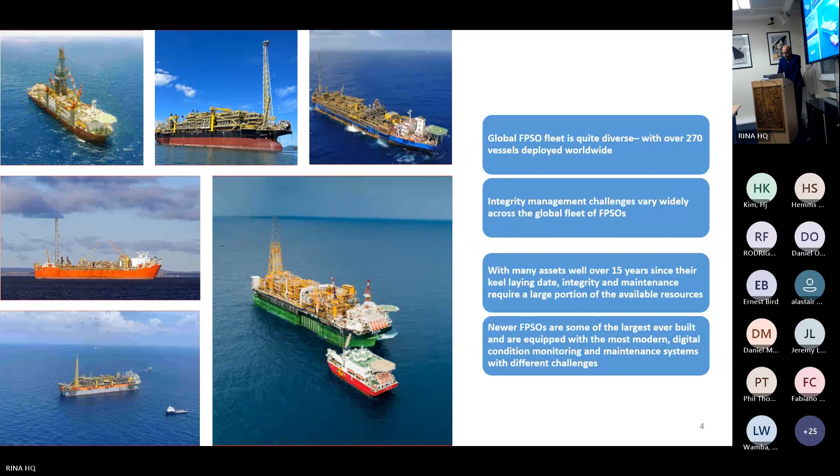The integrity management of FPSOs could be categorized into the wells integrity, comprising the downhole equipment, drilling riser systems and associated systems; the subsea integrity, comprising the subsea equipment, flow lines, flexible risers, control systems and associated equipment; the FPSO hull and marine systems, comprising the FPSO hull structures and marine piping systems and associated equipment; and the FPSO moorings, comprising the suction pile, chains, polyester ropes, mooring jewelry, chain stoppers, and associated systems.

Then the FPSO topside structures comprising of the structural modules, the pipe racks, the local equipment rooms, the workshops, laydown areas, and so on. Then comes the pressure systems, the FPSO pressure systems comprising of the piping systems, the pressure vessels, heat exchangers, and associated equipments.

Each one of these categories will be a topic on its own for separate discussions.

Today, I'll be discussing with you the FPSO hull and marine systems, which comes under the classification of structural integrity management strategies. This would provide an overview of typical integrity management strategies followed on FPSOs.

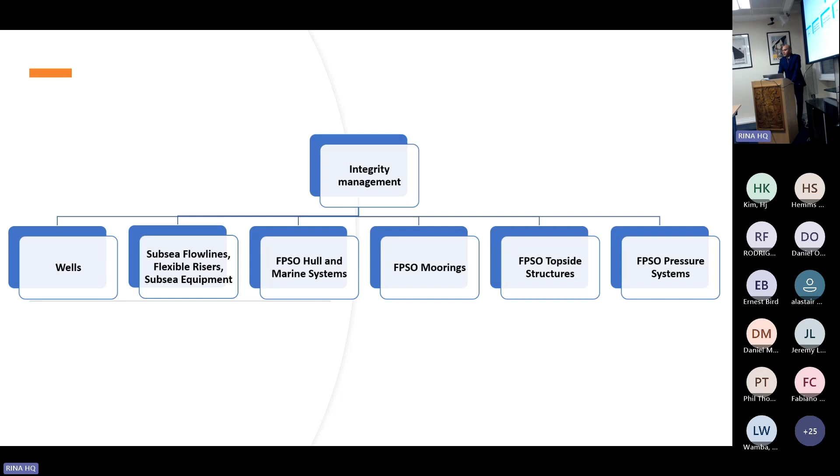The starting point of integrity management is the class rules and the industry guidance, which includes applicable industry recommendations such as API, ISO, and other regulatory requirements such as the IMO MODU code, SOLAS, MARPOL, and the class and flag state requirements.

The integrity management involves the inspection plan development, the inspection execution, the anomaly management, and the fitness for service assessments.

Opportunities to support the FPSO integrity management can be adopted from several different areas. These include procedural improvements, the application of new technologies, design improvements, and the utilization of digital solutions.

Let's look into the inspection plan development. The structural integrity management program starts with a class rules-based foundation.

The traditional inspection regimes use inspections on a calendar basis to verify the integrity of an asset. A key difference in the operation of FPSOs is that, contrary to the regular dry docking intervals of marine vessels of every 2.5 years, FPSOs often remain on station for the entire service life.

Being stationary, FPSOs are subject to a more uniform parcel offloading pattern and site-specific environmental conditions that make the structural load aspects more predictable. This creates the opportunity to consider a different inspection regime from that of sailing ships.

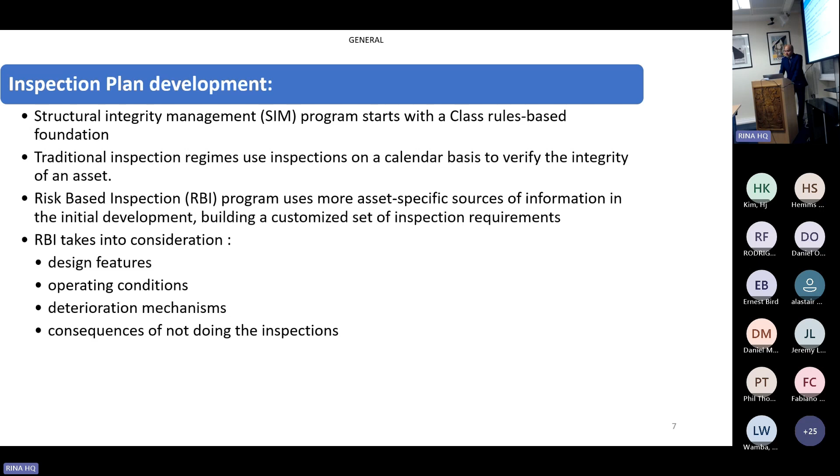The RBI also takes into consideration the design features, the operating conditions, deterioration mechanisms, and the consequences of not doing the inspections.

The RBI utilizes a risk assessment and management process to develop and manage a forward-looking inspection plan that directs inspections towards the areas of highest risk.

It focuses on failure modes initiated by material deterioration or degradation mechanisms, where risk can be effectively addressed through inspection of the equipment and structures.

By optimizing the inspection regime using risk-based techniques, opportunities may also be identified to minimize not only the asset risk, but also the safety risk to personnel performing the inspections.

This is a proven dynamic asset integrity management method that uses risk techniques to prioritize the inspection activities, identify and understand the risk drivers, and as a consequence, develop and implement effective risk mitigation strategies.

This specifies which components to inspect, identifies the degradation mechanisms, the components that are affected by these mechanisms, the appropriate inspection method for each particular type of scope, and defines the frequency of the inspections.

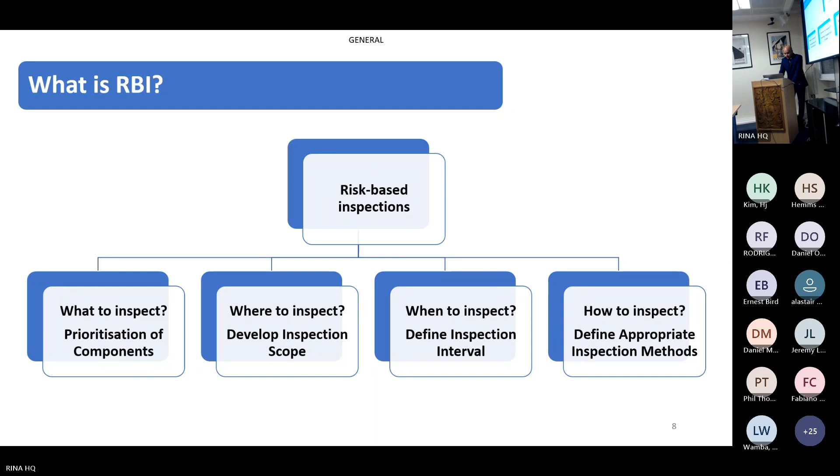The development of the RBI plan involves the data gathering phase, the component grouping phase, the baselining and fitness for service assessments, design analysis that includes global and local strength and fatigue analysis, selection of components for structural reliability analysis, determination of target reliability level, and the fatigue and strength reliability analysis.

This also involves qualitative risk assessment to identify critical elements and other factors that are not covered by the reliability analysis. Thereafter comes the RBI plan development phase that defines the inspection and monitoring requirements.

The component grouping phase delineates the components within the asset hierarchy into manageable logical groupings or inspectable units, with an understanding of the applicable degradation mechanisms driving the scope of inspection within the unit.

The FPSO hull structures, the mooring systems, marine systems, riser systems, and the topside modules consist of many components, and each has a role and function in the overall integrity of the asset. Understanding the complex interactions and dependencies of these elements will determine the efficacy of the program.

This boils down to a question of damage mechanisms and the correlation of these mechanisms across a grouping of structural components, if that correlation exists at all. In other words, what are the prevalent damage mechanisms? What is the best approach to inspect them? And what to do when anomalies are discovered for those damage mechanisms?

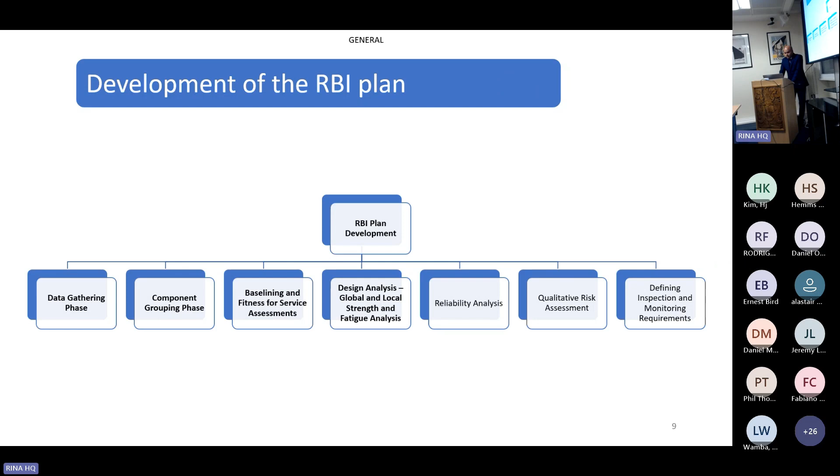The consequences of the risk event come in the x-axis and the likelihood of having a risk event in the y-axis. It is noted that the risk assessment for the prioritization step will be limited to the scenarios resulting from the deterioration mechanisms of the components within the scope of the analysis, and which can be detected by inspection, but also further informed by the asset's unique structural features.

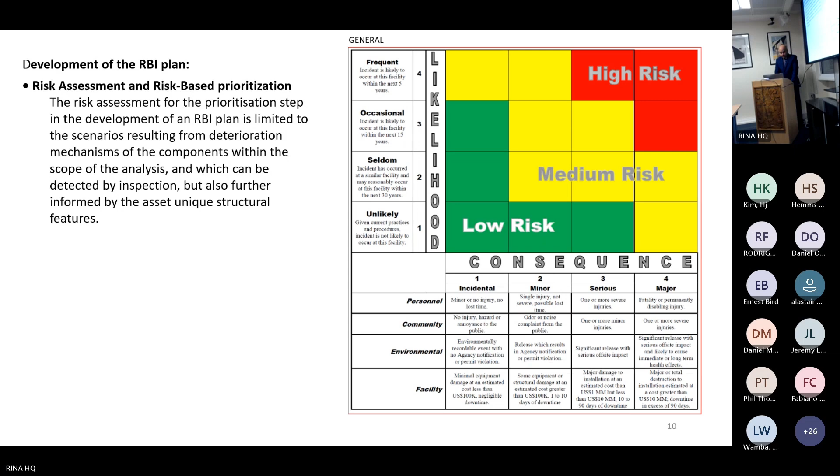One key factor in defining the inspection frequency is estimating the likelihood of an undesirable condition occurring based on the component's current condition and degradation rate.

The corrosion rates of FPSO structures depend on the effectiveness of the cathodic protections. In the case of cargo tanks, the cargo composition, the content in any space, the content composition, the inert gas properties, the temperature of the contents, the maintenance activities on the structures, and so on.

Each inspectable component should have its own inspection interval defined based on the component reaching a damage condition rather than the failure, but realizing that the worst cases within an inspectable unit may drive the overall inspection frequency of that unit. For the RBI plan management, these decisions are part of managing the plan with time and are directly dependent on the age of the unit, the structural configuration, presence of anomalies, and so on.

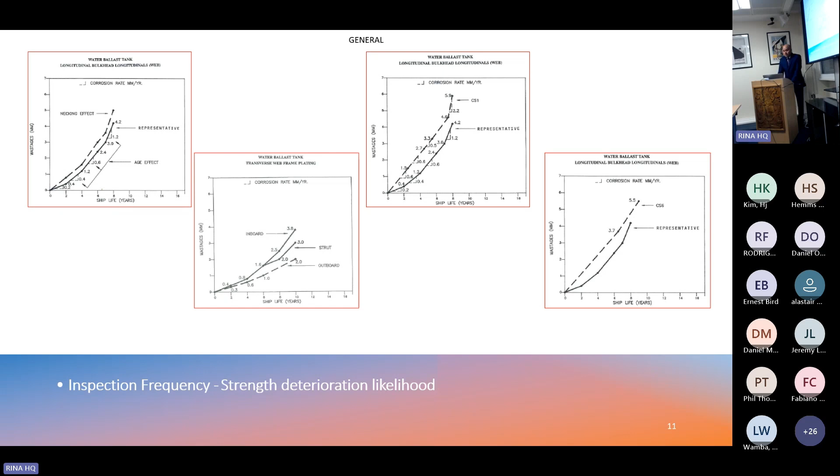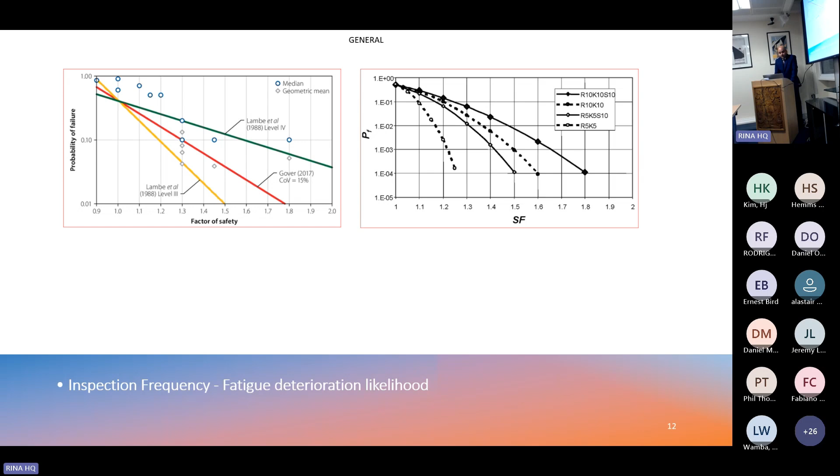And now moving to the inspection execution phases. Generally the underwater external hull inspections up to 30-meter water depth are carried out by divers. However, there are safety implications associated with this activity, and hence ROVs are widely used for underwater cleaning and inspections. This short video footage shows the cleaning and inspections of the hull using ROV.

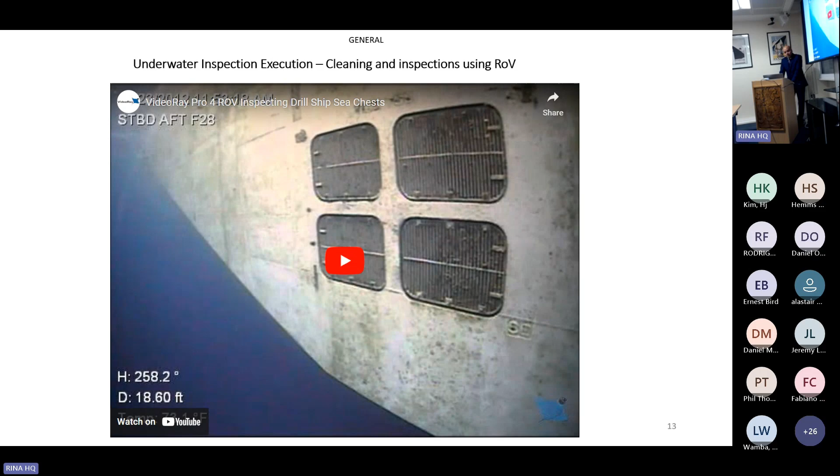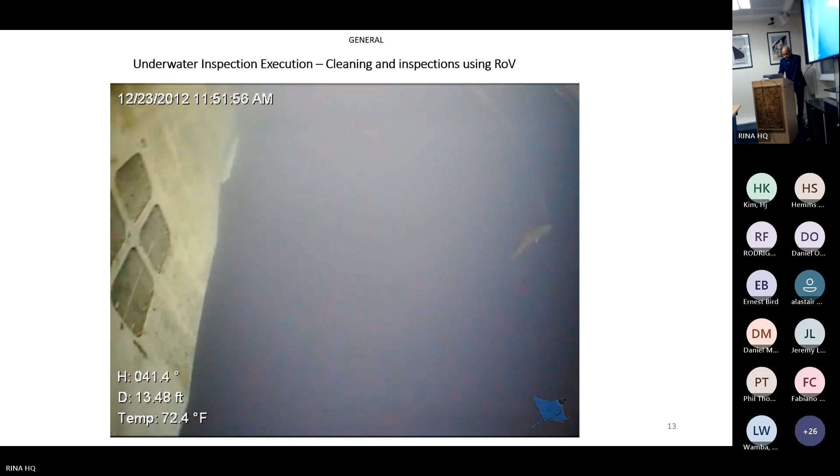I was having some other video earlier and it didn't work, so I just picked up something else here. It should be showing hull inspections getting done by the ROV. That's just to give a flavor of the activities ongoing. That's the intent of showing here.

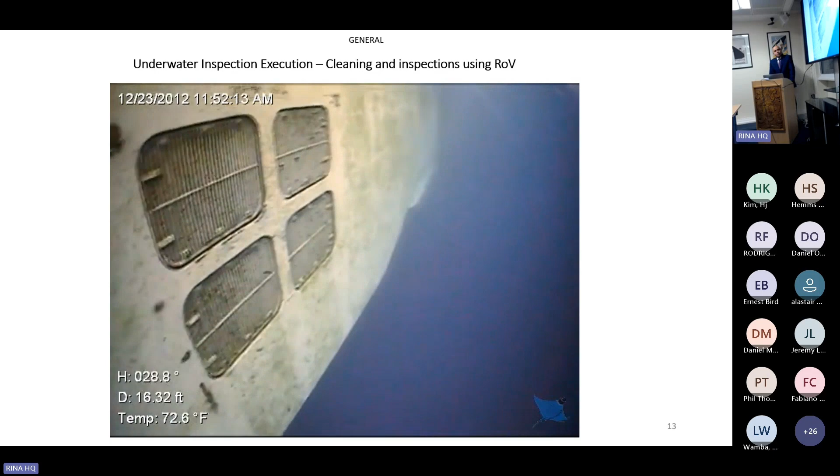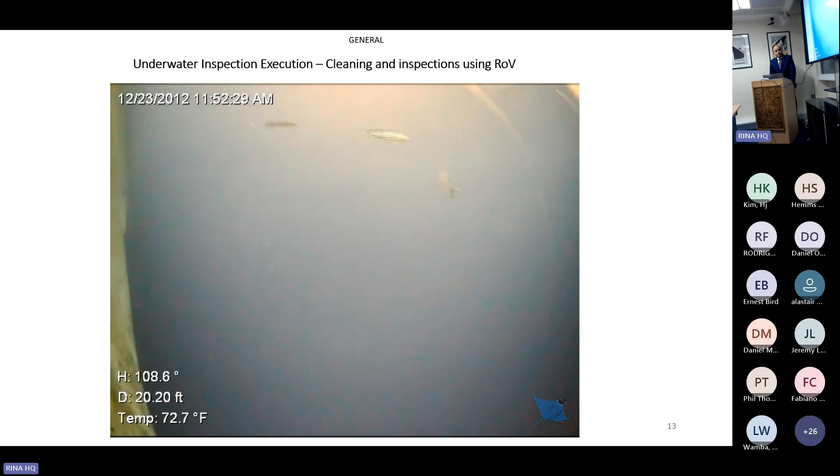So there's a sea chest over there. All the grills will be cleaned by the ROV. Instead of divers, we normally use ROV. Divers can do that work too. So this gives a flavor of those activities. Now let's go to the next slide.

Now moving into the internal hull inspections. One of the challenges of the internal hull inspection is the confined space entries. The confined space entry is a high risk activity. Confined spaces pose dangers because they are usually not designed to be areas where people work.

These spaces often have poor ventilation, which allows hazardous atmospheres to quickly develop, especially if the space is small. The hazards are not always obvious and may change from one entry into the confined space to the next. Carrying out inspections on board an FPSO with concurrent production operations is a major undertaking and requires detailed integrated planning and supporting good coordination of activities.

Entering a confined space, including tanks, requires complete cleaning and gas freeing of the compartment. There should be provision for ventilation, lighting, and access. It also requires certification that the tank atmosphere is safe for entry, especially if residues remain in the tank. A high temperature atmosphere in the tank could be prevalent depending on the location of the space.

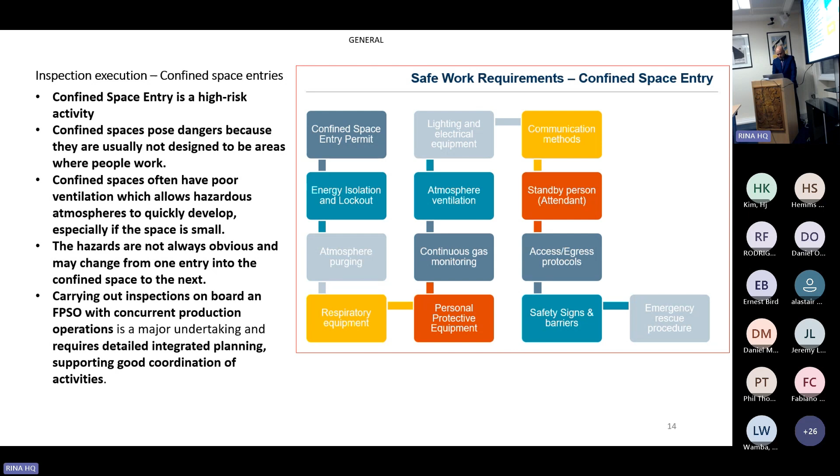The factors to be considered for the confined space entries include the tank isolations, the operational impacts, the personnel aspects, the structural strength and fatigue aspects, and the financial aspects, to name a few.

The storage tanks to be inspected need to be positively isolated as per the operational standards and taken out of service. The tank system's positive isolation can be a challenge, making it difficult for storage tanks and related piping systems to meet the positive isolation standards.

The challenge is more noticeable with FPSOs converted from conventional tankers with pump rooms and bottom piping as compared to the newer FPSOs fitted with submersible pumps. Also, a safe de-isolation of tanks and return to service is required on completion of activities similar to a trading tanker.

On the operational aspect side, the simultaneous operations, SIMOPS, aspects need to be managed effectively. For example, in the case of void spaces with dehumidification systems in place, opening the tank for inspection reintroduces a more corrosive environment. On the personnel aspect side, the tank cleaning operations may expose personnel to safety hazards such as naturally occurring radioactive materials, mercury, and so on.

The people on board, the POB constraints while carrying out inspections, is in order to accommodate additional personnel such as the rope access teams, scaffolders, inspection engineers and technicians, painters, tank cleaners, class surveyors, rescue personnel, and so on. They all need to be factored in.

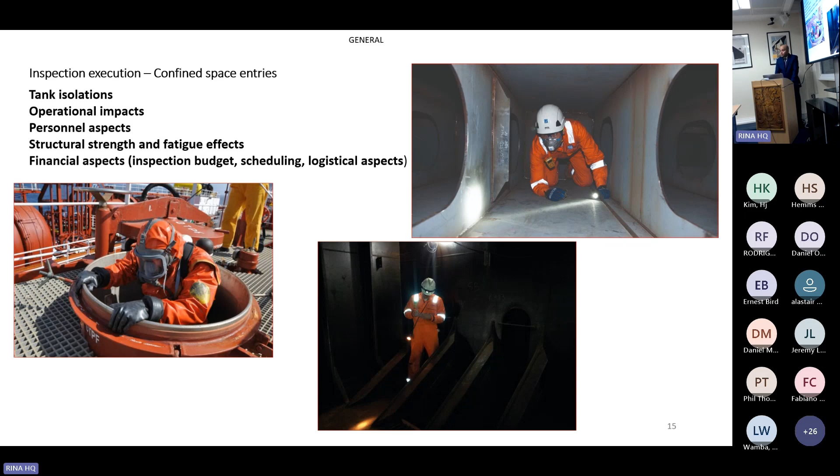For inspection at heights and in confined spaces, drones have now been widely used and have been shown to be able to provide a visual survey and UT gauging of structural components inside tanks, confined spaces, and topside structures. This short LiDAR and video footage indicates the visual and UT inspections of the cargo tanks using drones.

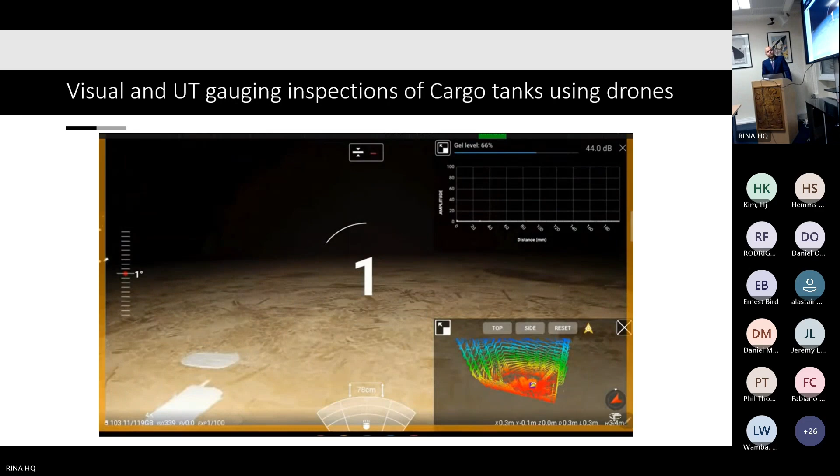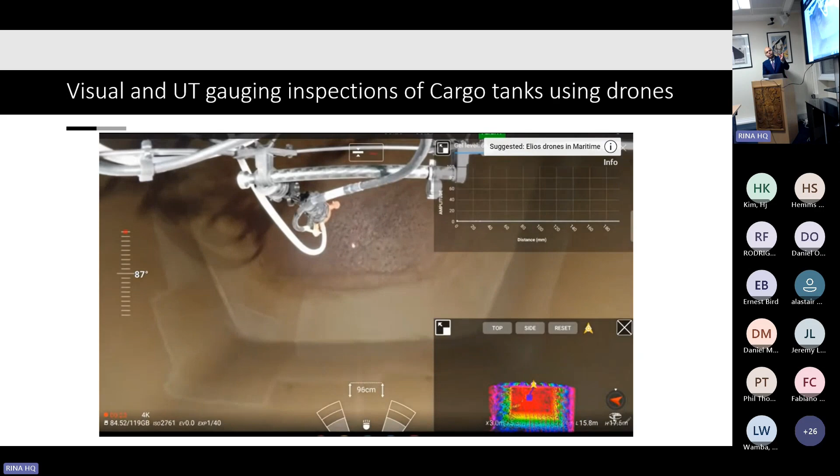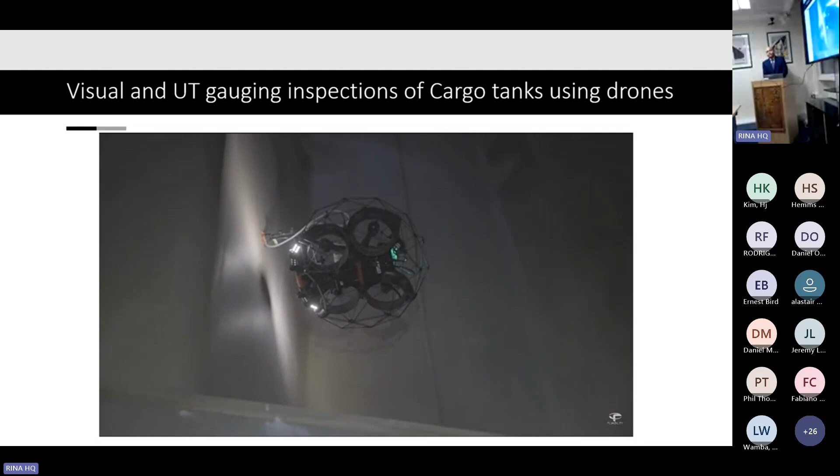So drones are doing the work, gauging and visual inspection inside the tanks at heights. Otherwise, it has to be done by personnel in rope access. Personnel has to do this work, and there's quite a lot of safety impacts because of it.

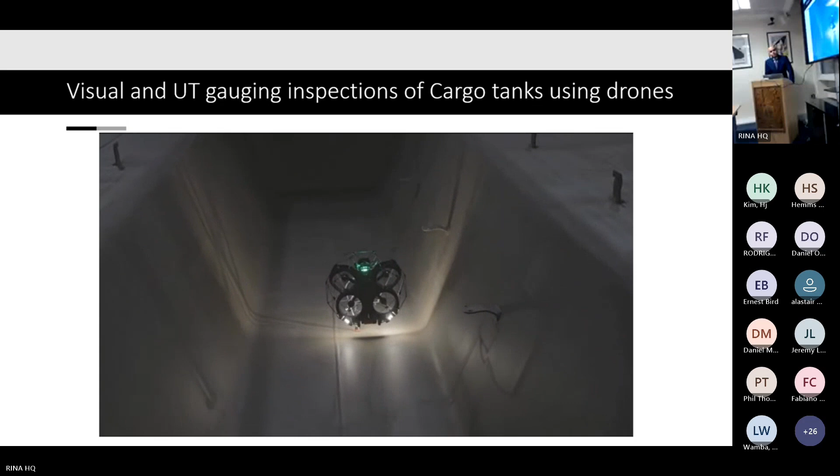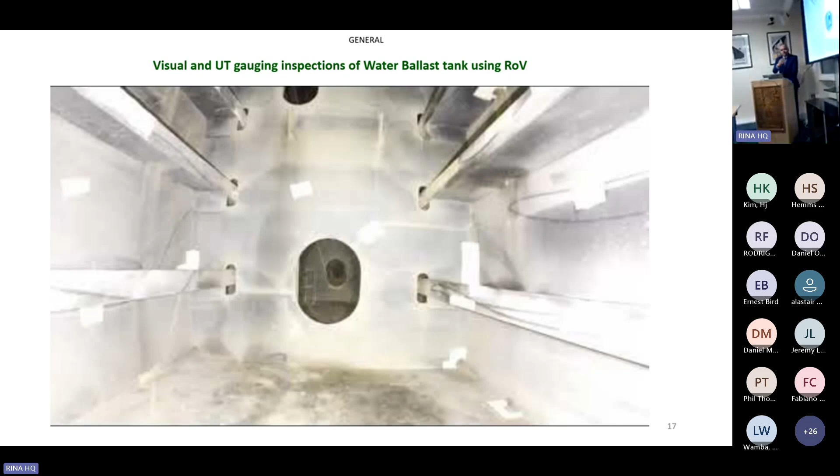The existing cutouts in longitudinal structure, girders and structures are generally enough to have the drones move around. The inspections using ROV has been proven effective in existing ballast and void tanks of the FPSOs when the unit has clean ballast water and tanks with good coating conditions.

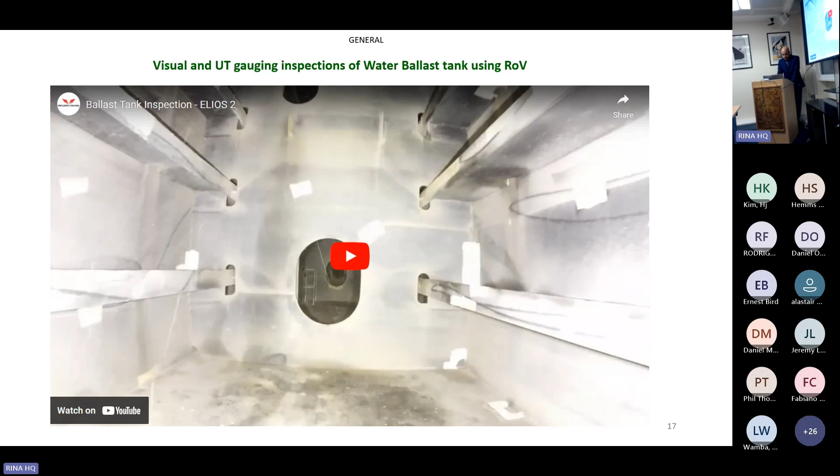Yeah, we'll run this short video showing the ballast tank inspections using ROV.

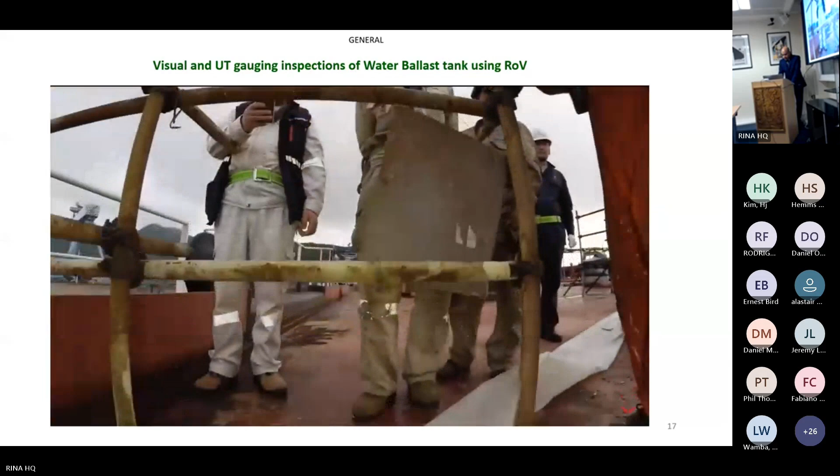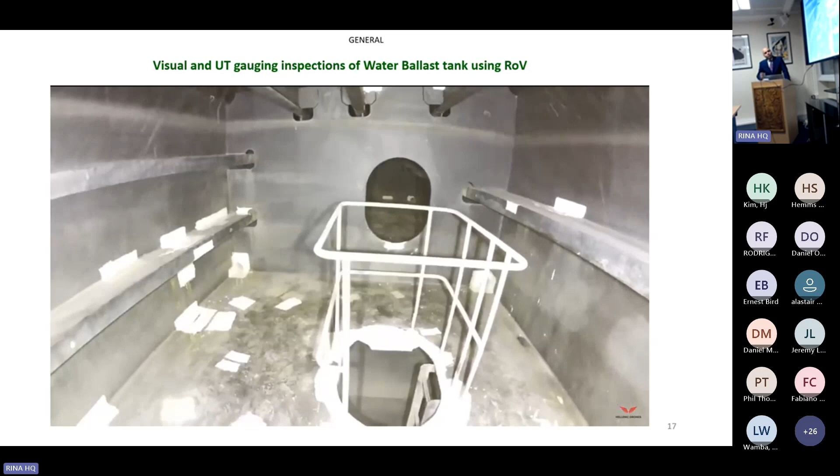Again, I was trying to show another footage, but it doesn't work earlier. So this is a ballast tank inspection with ROV. So the tank is filled with water, and then the ROV, which is tethered, should be operating inside. So it can do the gaugings as well, visual and gaugings.

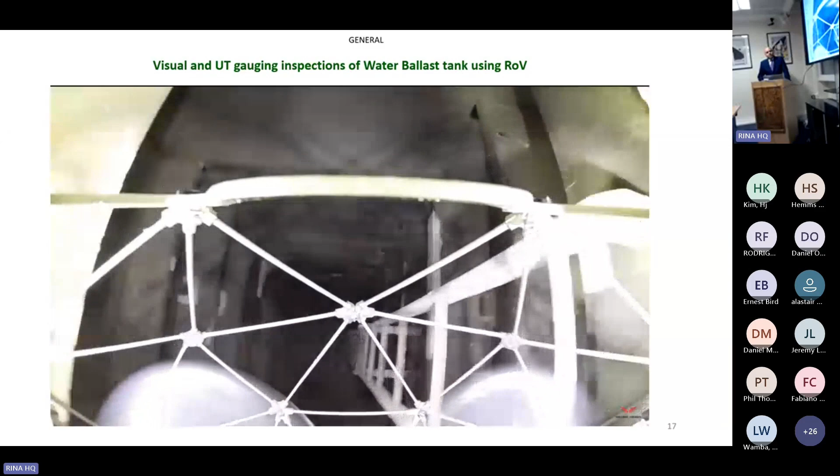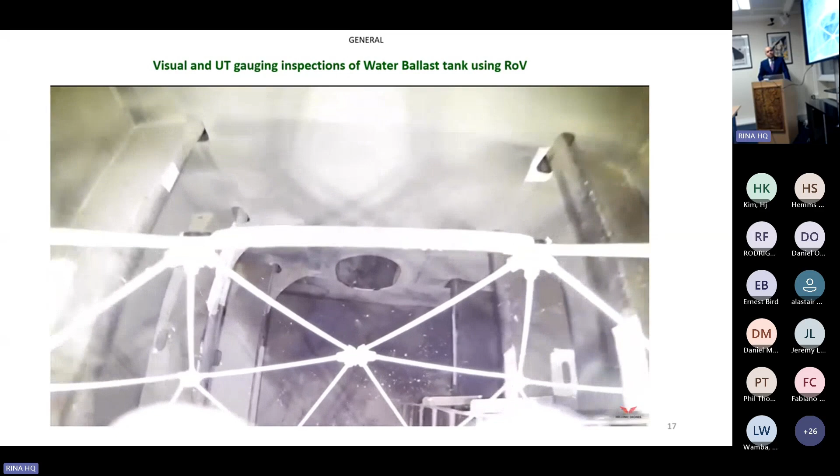But it will not work for a cargo tank. The cargo tanks won't be clean enough, and also the operators don't want to fill the tank with water. So, it will work for the ballast tanks.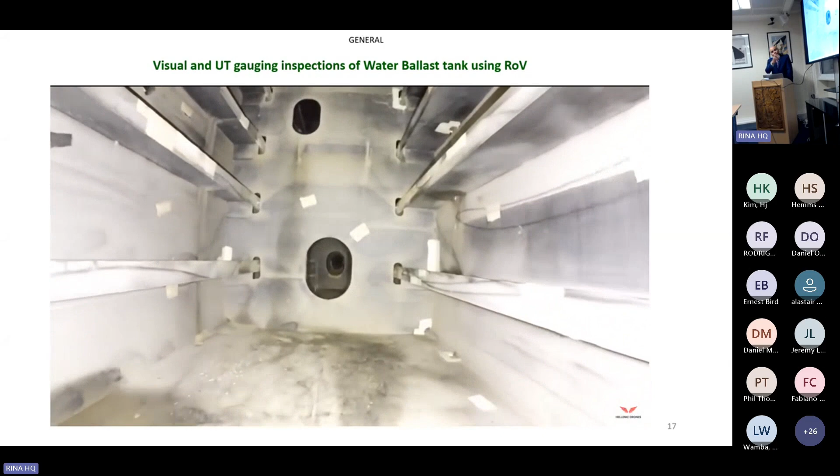Again, the planning, the examination route, route planning has to be done properly so that we can maneuver the ROV inside the cargo, inside the tank.

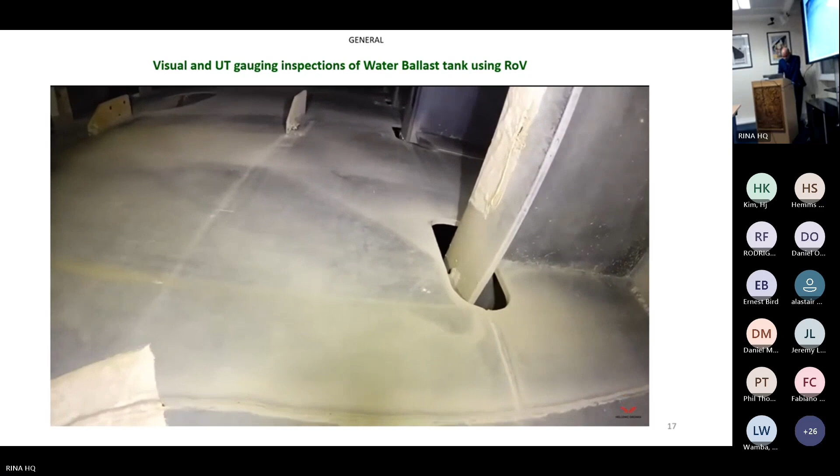The stiffeners, piping, stringers, and hard to reach areas cause tank cleaning to be troublesome and near impossible to automate. Reducing the complexity of the tank design, as well as increasing the size of the access openings, will allow remote technologies such as crawlers and drones to be utilized for tank inspections.

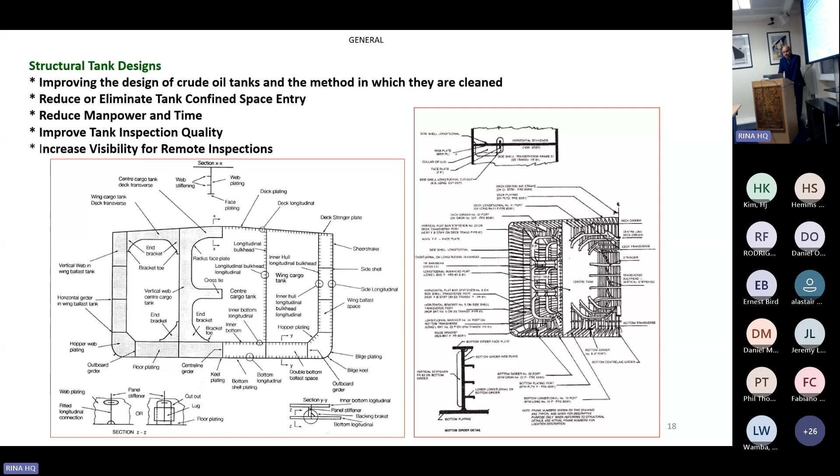Also, another thought about the design enhancement for the crude oil washing of the cargo tanks and the sludge management. The stiffener profiles inside the tanks could be modified such that there won't be any sediment accumulation on those stiffeners, and that will facilitate the crude oil washing.

Again, another point is about the tank suctions - they can preferably be located at the center line of the tank. Alternatively, consideration may be given to a suitable list within the acceptable hull girder strength and stability parameters to facilitate flow towards the tank suctions, or the suctions in the tank sumps, if allowed by the double hull construction.

Larger sized limber holes to be provided through the transverse and longitudinal frames so that it will allow efficient cargo drainage to the pump suctions as well.

And one point is that the MARPOL requirements for the COW systems require a minimum of 85% vertical and 90% horizontal surface coverage. Consideration for additional COW machines during the design phase by a thorough shadow analysis is recommended to maximize the coverage, especially in way of the bottom areas.

It could be considered to provide a crude oil pumping system arrangement to run the dedicated crude oil pump for crude oil washing activities during the offloading operations.

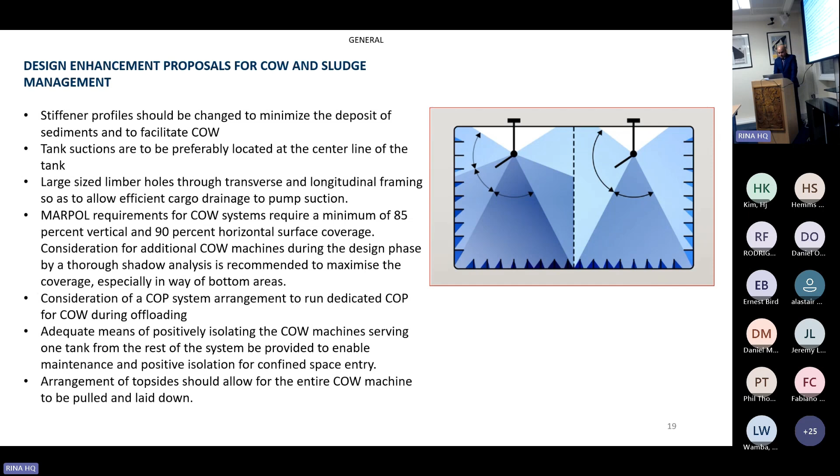Let's look into the potential solutions for the new builds. The alternative designs for the new builds and the alternative materials for construction of FPSO oil tanks could be considered. That could help in reducing the amount of residue and corrosion.

Currently, the FPSO cargo tanks are constructed with steel and paint coated, which is inexpensive and bears the required strength, but it is prone to corrosion and fatigue stresses over time. Some of these possible alternative materials include the use of sandwich plate systems, that is a concrete laminated with steel, or steel laminated with epoxy, or high strength plastics or other composite materials.

Another proposal would be the adjustment and increase in the location of the COW nozzles, that they increase the number of COW nozzles and possible implementation of COW nozzles near the floor of the tank that could assist in cleaning the shadow areas of the tank, but would require redesign and modification of the piping of the COW system.

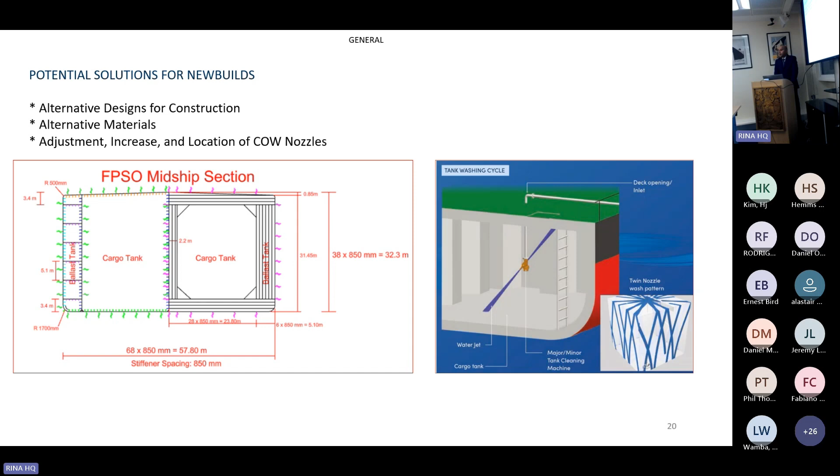Also, the COW nozzles are typically programmed for rotation speed, rotation degree, washing time, flow rate, and quality of wash. As an alternative to programmable machines, non-programmable machines could be used that wash all areas, preventing only washing the bottom of the tank and leading to build up on vertical and other spaces away from the bottom of the tank. So I recommend a non-programmable machine has got benefits as well in that way.

Another point to consider is about conducting repairs while operating. Executing FPSO structural repairs while operating is a situation all operators typically face during the life cycle of the FPSO, even under the most rigid asset integrity management regimes. To overcome some of the challenges already discussed, operators must find solutions that will produce the expected result while having expectations of safety of personnel, environment, and the asset, reduced impact to production, achieving effective results, and compliance with class and statutory requirements.

Some of the best practices to be considered when facing the situation would be front-end planning, reduce or eliminate the tank confined space entry, reduce manpower and time, improve the tank inspection quality, and increase the visibility for remote inspections. So if I go into details of that, front-end planning is one of the most important activities leading into a successful repair campaign.

When planning for offshore work, it is strongly recommended to have a holistic approach to safety, including planning for evacuation of injured personnel, emergency response, and tank preparation for confined space entry. Develop detailed repair specifications that are suited for offshore execution, including qualified welding procedures for water-backed welding if needed.

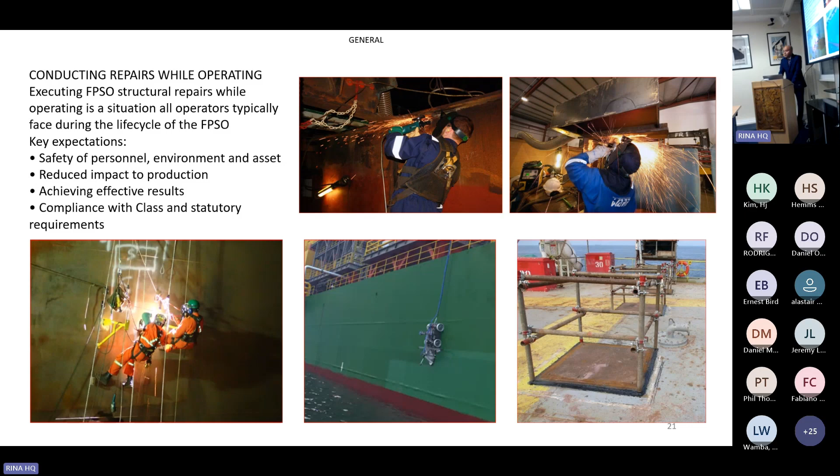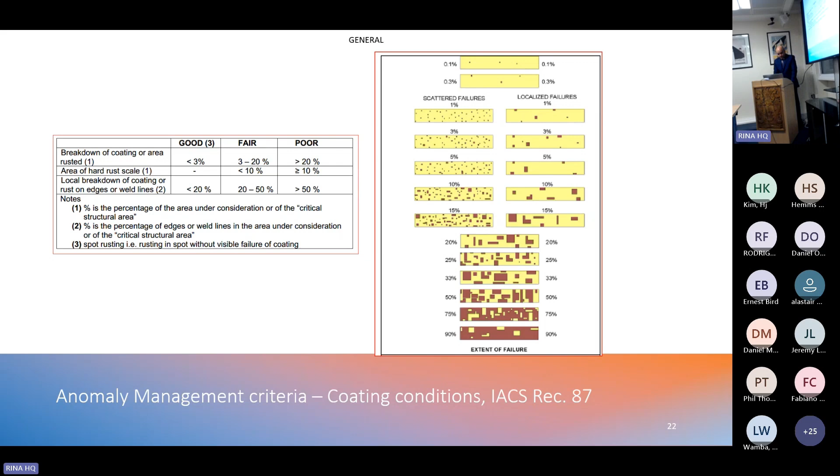With regard to the anomaly management criteria, the assessment of coating conditions in accordance with IACS recommendation 87 is indicated here. The good, fair, poor grading of coating conditions, depending on the extent of coating breakdown and presence of corrosion scale, has been indicated on this table and the schematics here, in accordance with IACS recommendation 87.

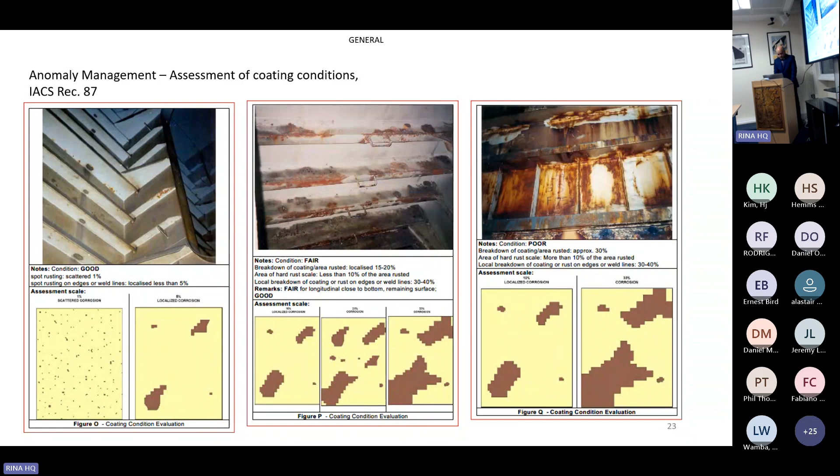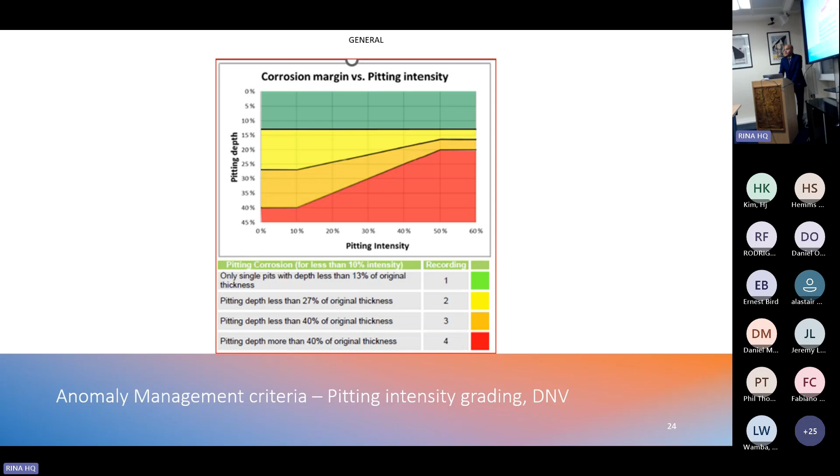Let's look into digitalization in the integrity management activities. This has involved adopting techniques from other sectors like aerospace and automotive, for instance, life cycle management, natural language processing, multi-physics modeling, and simulations. Today, we are prepared to embrace the recent transformations to enable the FPSO sector to adopt a new level of technology that is more familiar to Silicon Valley.

Technologies like digital twins, augmented reality, autonomous functions, and artificial intelligence are changing the integrity management activities and belong to a broader industry trend of digitalization, applied research, and clean energy transition, aided by various technologies that are prepared to transform the offshore sector. IoT and big data are becoming technologies being incorporated into the FPSO sector as the number of devices connected to the internet is increasing. The physical devices connected to internet, the so-called IoT devices, share a huge amount of data gathered from sensors and can be analyzed in real time to derive conclusions that help make informed decisions for continuous improvements within operations.

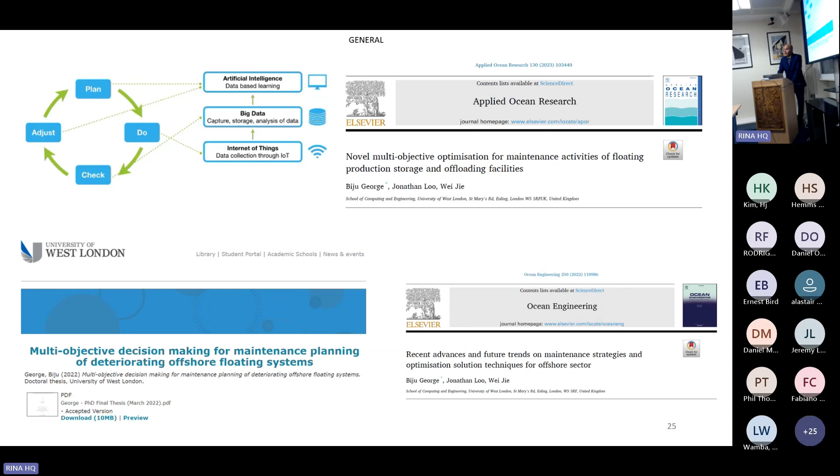A recent research carried out by myself in this field has proposed a framework comprising an artificial intelligence technique of deep Q reinforcement learning, DQN formulation, as a solution to a multi-objective optimization problem for the maintenance activities of offshore assets. The details of this work are available online in the University of West London repository and also published in Elsevier Science Direct journals, the Applied Ocean Research and Ocean Engineering, over the past years, and recently at the proceedings of last week's World Maritime Technology Conference 2024.

A bit of insights regarding this research work. The technical problem formulation, the multi-objective problem formulation has been shown here. The main deck of an FPSO has been modeled in this work.

A 15-year-old hull with the principal dimensions of 360 meters length between perpendiculars, molded breadth of 55 meters, and molded depth of 35 meters. A commercially available loading calculator has been employed to parametrically define the model.

The decision variables considered in this work were the design features, operating conditions, deteriorations experienced, and the consequence of not doing the maintenance activities. The schematic representation of the multi-objective problem formulation, taking into account the personnel resources with the application of greedy algorithm, has been shown in the figure on the right-hand side.

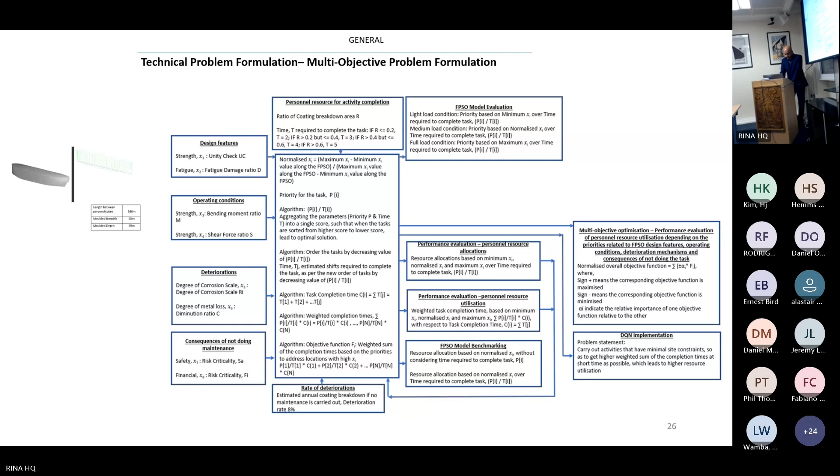The application of DQN to solve the formulated problem of maintenance planning has been presented in this figure. The DQN problem statement has been defined as to carry out the activities that have minimal site constraints so as to get a higher weighted sum of the completion times in as short a time as possible, which leads to higher resource utilizations.

The goal was to achieve the best trade-off between the turnaround time of the activities and mitigating the risk to the asset's performance based on the completion of activities in the FPSO work management system.

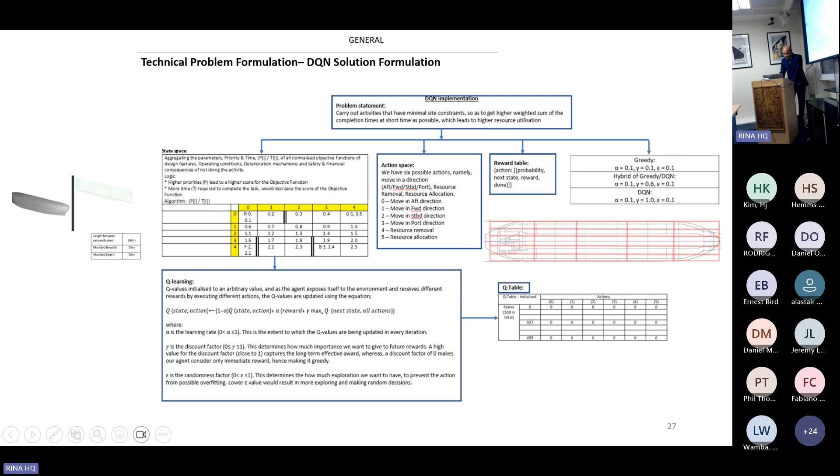Again, I will not go into details, but anyway, I can summarize something on that. Okay, benchmarking was actually carried out.

The variation of the average time steps per episode and the variation of the average rewards per time step for the hybrid and DQN models with respect to the greedy model has shown that the hybrid and the DQN models perform better than the greedy model. And as they get trained, they perform better.

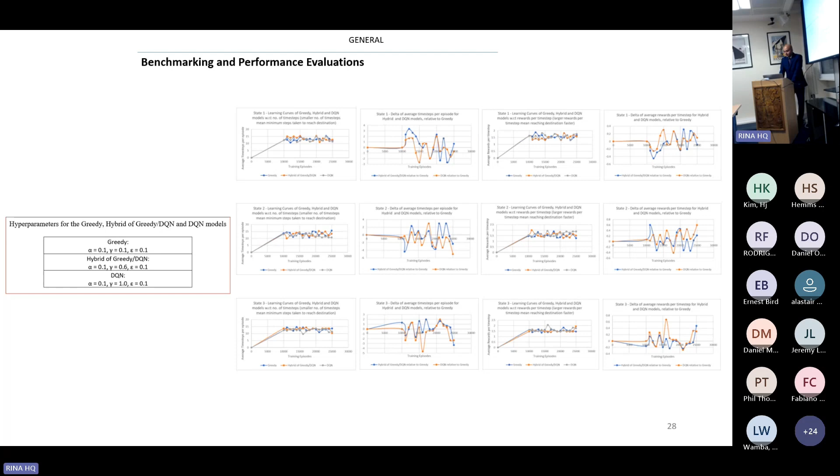The contributions of the work are that a novel work management framework has been proposed that comprises of the DQN formulation as a solution to the multi-objective optimization problem for maintenance activities of FPSOs.

The framework enables carrying out activities that have minimal site constraints, considering the design features, operating conditions, deteriorations, consequences of not doing the activities, and the time required to complete the activities to get a higher weighted sum of the completion times as short as possible, whereby achieving higher resource utilizations.

It has been demonstrated that DQN has the potential to be employed to develop a dynamic work management system that adjusts the maintenance activities by achieving an optimal path for carrying out the activities that mitigates the risk to the asset's performance, depending on the changes achieved in the asset condition based on the activities completed.

This potentially maximizes resource utilizations, enhances asset condition, and leads to a reduction in the emissions from the asset and would supplement the regulatory oversight requirements.

This work demonstrates the Deep Q reinforcement algorithm has the potential to achieve the best trade-off between the turnaround time of the activities and mitigating the risk through the completion of the activities. This leads to optimizing the condition enhancement of the FPSO and improving the energy efficiency operational indicator.

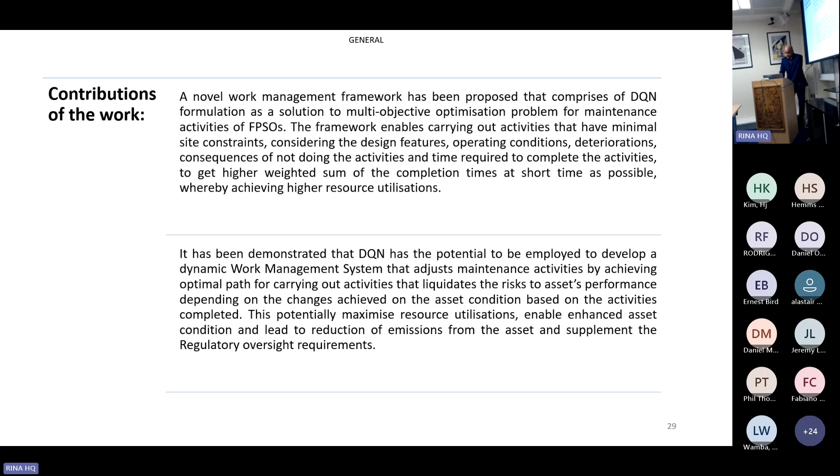With that, I am summarizing this discussion. It is to be noted that opportunities exist to support FPSO integrity management and could be embraced by procedural improvements, application of new technologies, design improvements, and usage of digital solutions.

Also, technologies such as digital twins, augmented reality, autonomous functions, and artificial intelligence are changing the offshore sector and belong to the broader industry trends of digitalization, applied research, and the clean energy transition, aided by the various technologies that are presented to transform the offshore sectors.

I would like to conclude by reminding you all, each one of us has a role to play in encouraging others and guiding youngsters and everyone to set their efforts towards the climate change problem, and to embrace digitalization and maximize utilization of artificial intelligence techniques to make contributions in enhancing the safety of personnel, environment, assets, and increasing the efficiency to achieve the net zero emissions target set by the IMO at the earliest.

Also, I'd like to remind you that we need to keep in mind that collaboration between the various stakeholders will be key to success in this journey. Thank you all, thanks.